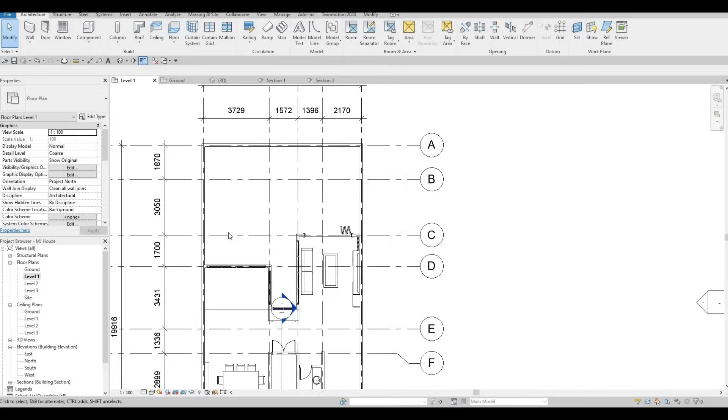What I want to do is go back to level 1, and I'll probably need to delete some part right here because I want to move this one to make it smaller, since I want basically an L-shape kitchen right here. So I'm going to delete this so it's easier for me to just add.

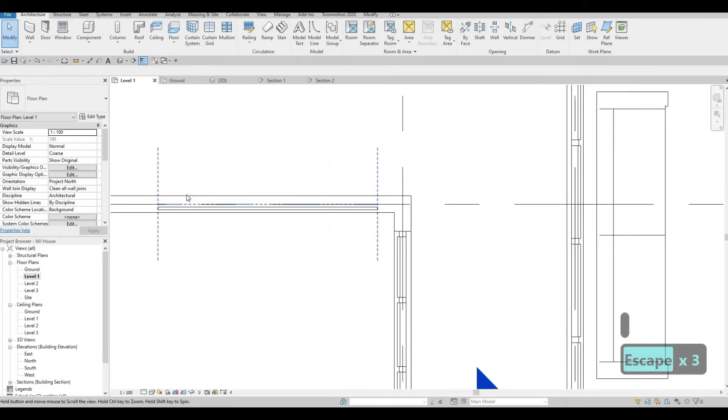I'm going to select this one, CS, and it will maintain the height and the distance from here. So that's why it's easier to just set one first and then do the others.

So I'm going to cut this one right here, and I want to make sure to make this one L, because we're planning to add more of the kitchen parts right here. After that, I'm going to go to 3D, and as you can see, it maintains the parameters that we set right here.

So now what we're going to do is go back to architecture, click on curtain grid, select that one, and add in the mullion all grid, and simply add it like that. So once you're happy and you set this up, I'll probably add the laundry right here.

So this is where the location of the laundry will be, but it's only going to be accessible from the outside. So now what I'm going to do is create an exterior wall. I'm going to go to ground floor and then CS on this, and I'm going to add a wall right here.

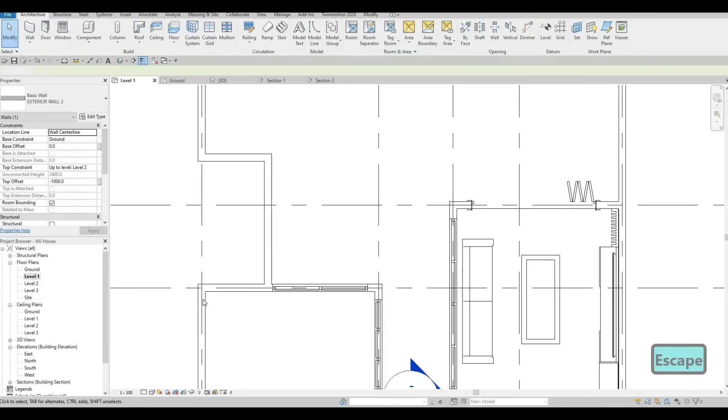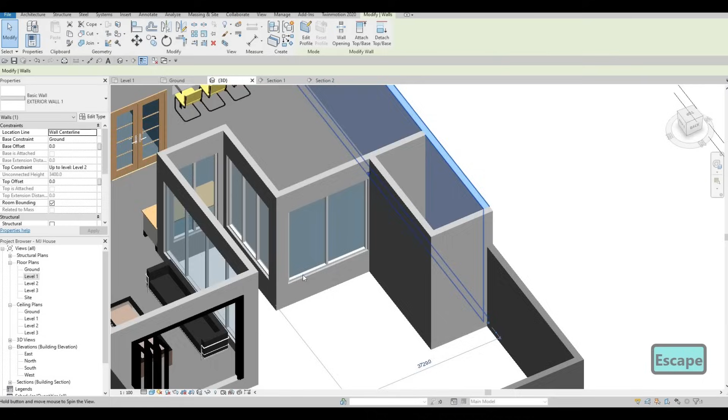So what I'm planning to do is extend this one all the way right here, and this wall will be extended as well. So we're just basically adding enough wall on this side, and then here it should be exterior wall, and here exterior wall, and this one is exterior wall number 2. And here, as we remember, we have a different finish.

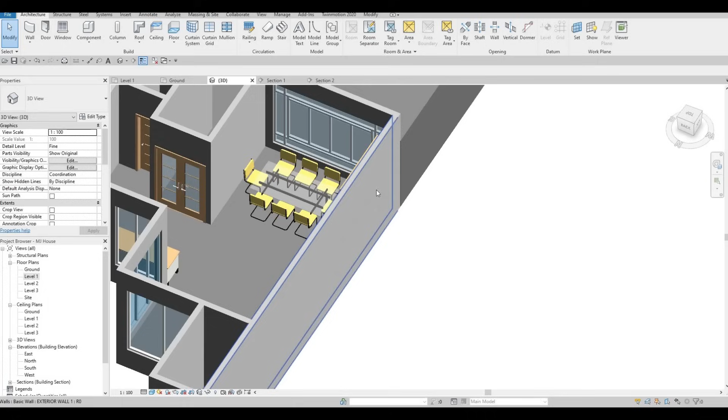So this one is concrete aggregate, and what we're going to do is split it this way so that we could have the same materials on all of this. So we're going to split those ones later on, and I just want to change where this is located.

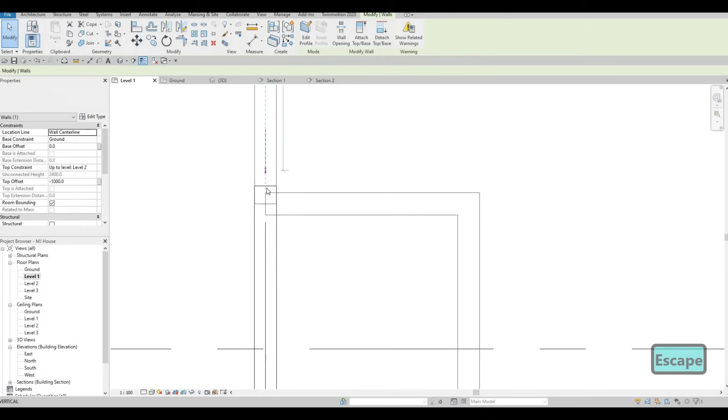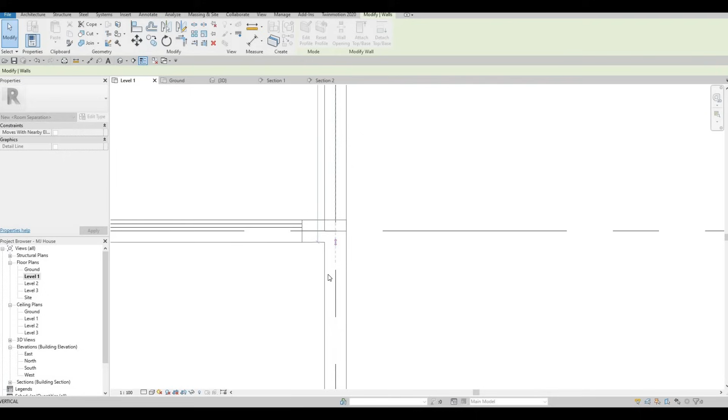I'm going to trim this out and then put it back. I just want to fix where the joining wall is. Similar to this, we want the joining wall to be on the edge, so I'm going to undo this.

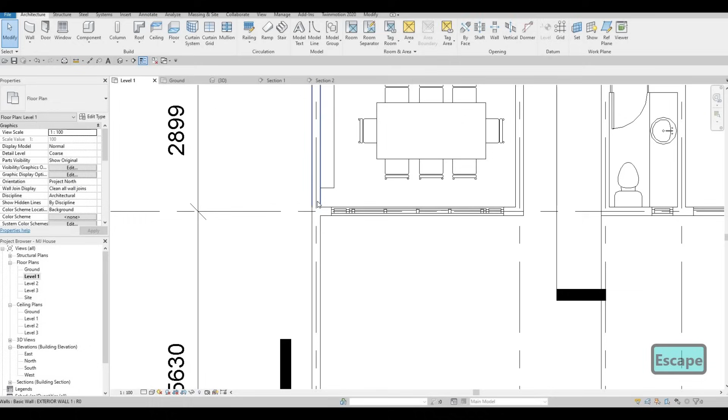So now this is the bigger wall, so it's easier to do later on. Same thing goes right here. Pull this one back first and then change the location of the bounding wall.

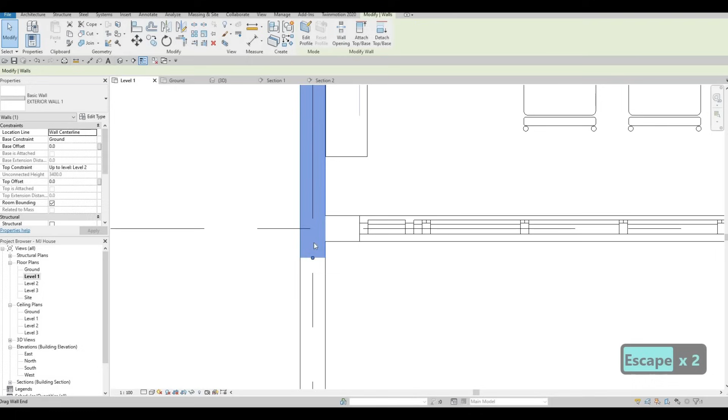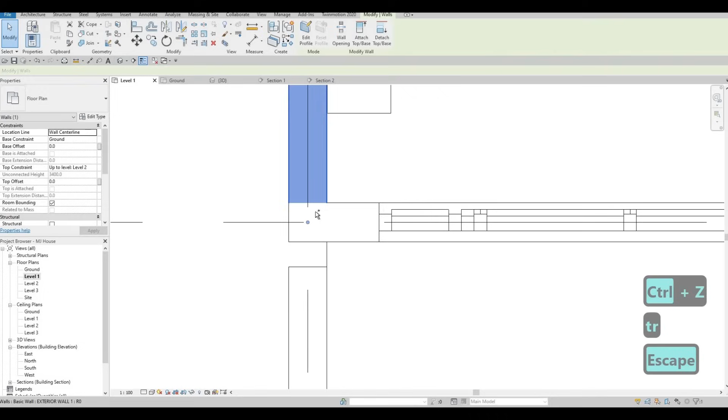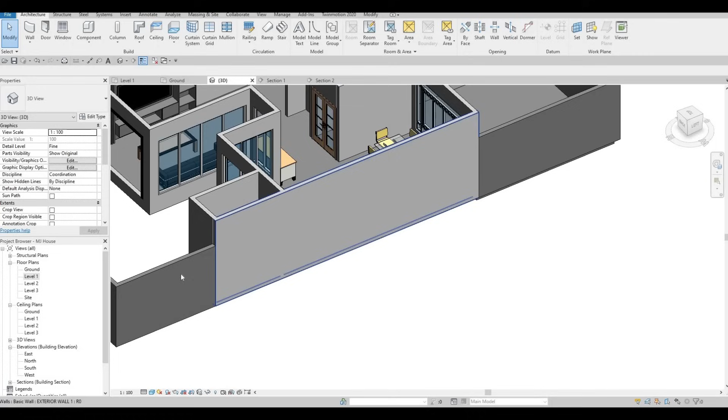Usually once you move it up and then pull it back, trim it first, and then this is because I want this one to have... so I'm just going to align this, AL, and then this is the one that has that. So once we do it, we only think of the face right there. So might as well do it now.

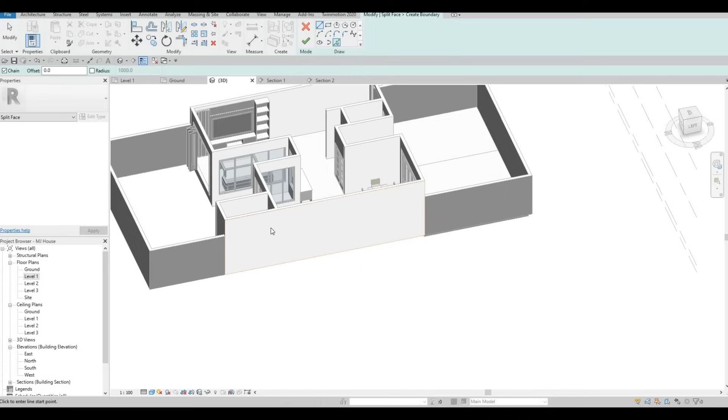I'm going to edit this type before we forget. So SF on that, and then you need to select split face, select this face. Once you do, we need to create a line. So I'm going to create a line from here all the way to there, and then click on finish.

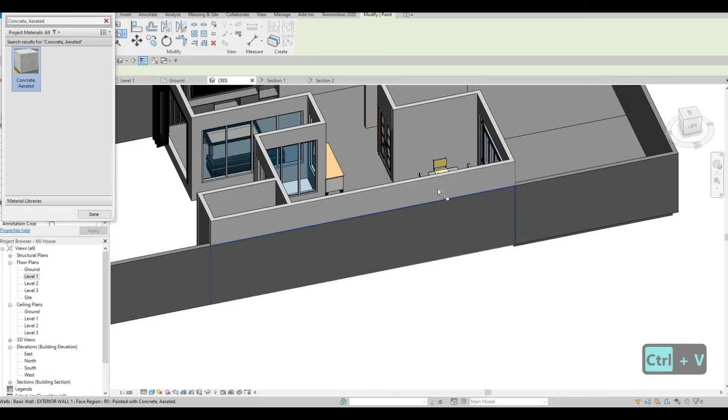After that, click on paint and then look for the same concrete and select that. So now it will be the same one as what we have before.

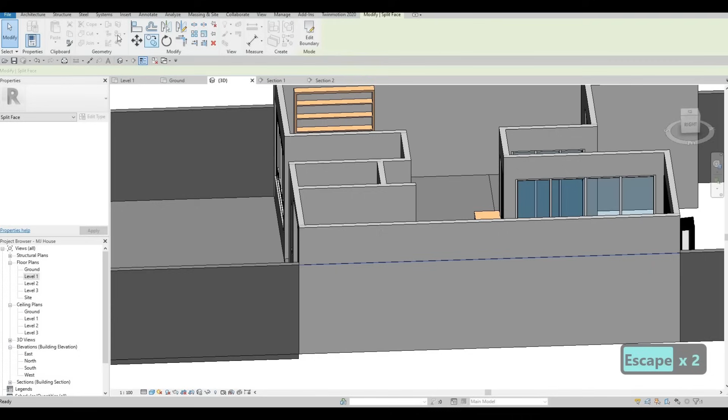At the same time, let's do it on this side as well. Split face this one, and we need to create this line right here, and then click finish and click on the paint, same thing. So it looks like everything is the border wall, and only this one is on top of it. This one got created on top of it, so that looks nicer.

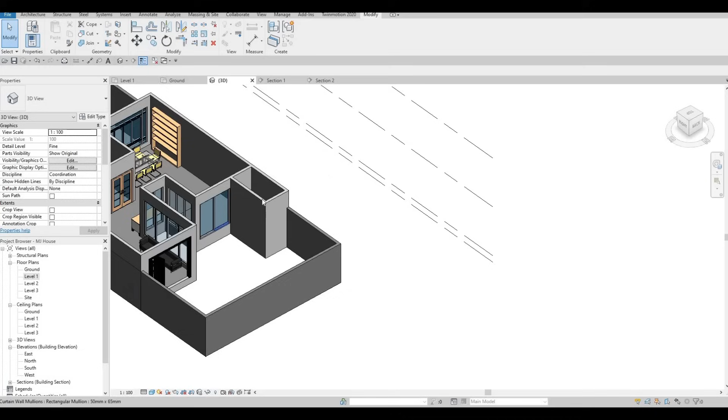So now let's go to this side. We're probably going to pull this one lower than the others, so we might just add the top right here, or we could just leave it like this. So that's good enough.

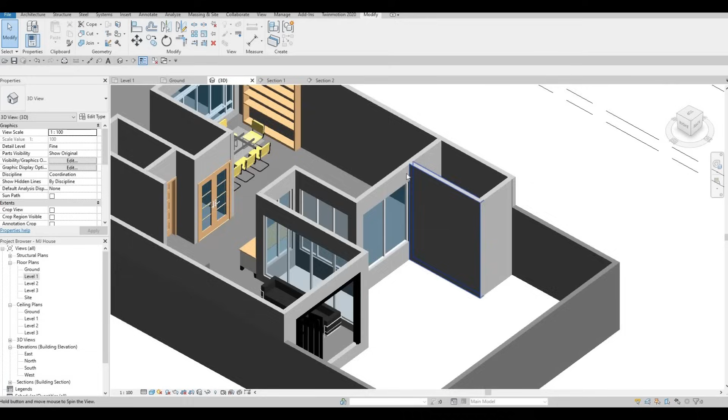We're just going to add a roof right here, and then here we could have in like a deck that goes around, and then we have our swimming pool right here. So let's create the swimming pool first.

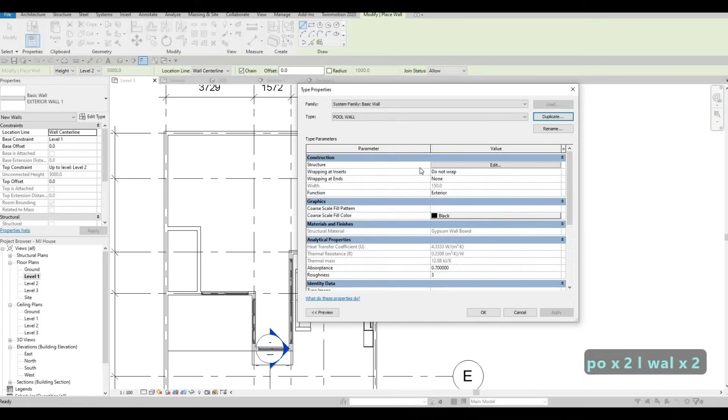Let's go to architecture. We create the wall first. Here, edit type, duplicate. This will be pool wall. Edit, and then here we could just change this one to around 50 thickness, and then here we could put something tile.

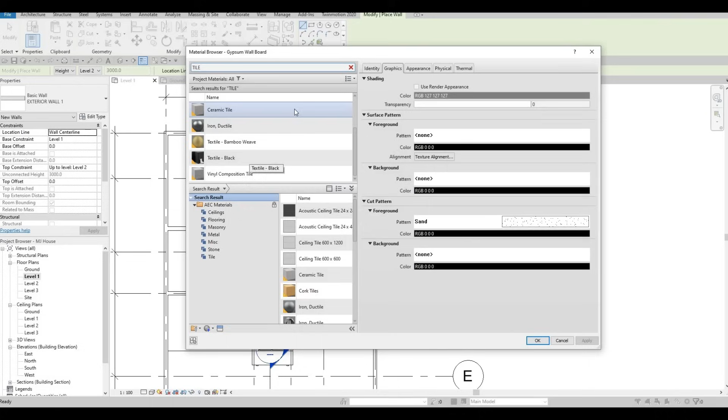So let's look for a tile. Ceramic tile will be good as well. Let's do ceramic tile, and then after that...

Let's click on rectangle. We want it to basically be on the ground first, and then click on wall. Pool wall is selected, and then we want the base to be, so top is ground, and then this one base is ground, and top level is ground.

So what I'm gonna do first is change the base to negative 2000, and then let's create a rectangle.

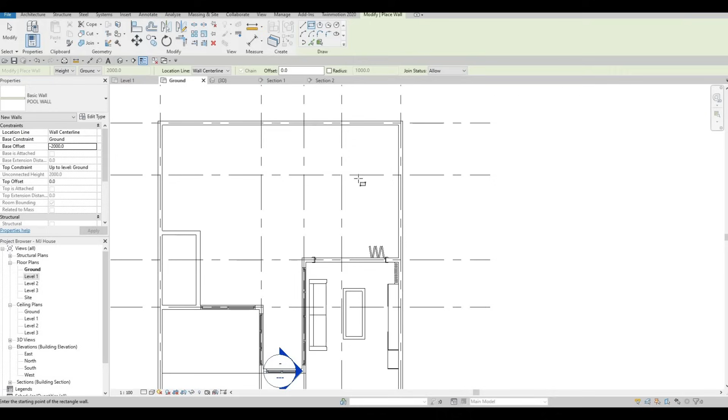So I'm thinking of, we have a deck here going outside, and then the pool is somewhere right here.

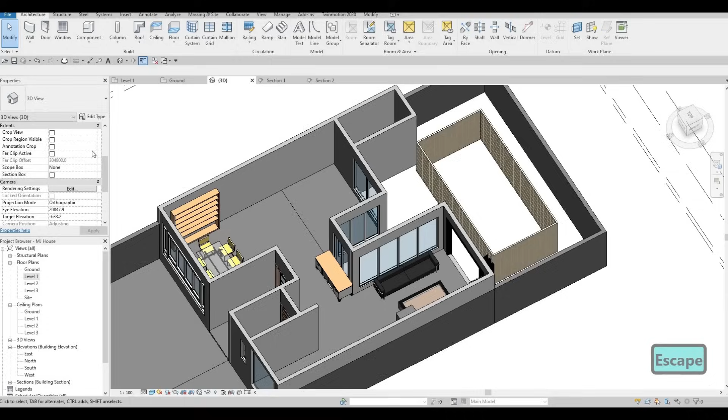Don't worry, it's because of the view range. That's why we're not seeing it. But if we go to 3D, it's right there. It's just not showing because of the view range. But in order for us to see it, go to ground floor and then change the view range, and then this one, the depth, unlimited. So it's visible like that.

So now, this is a big, I want to have a rectangular pool. We have some spacing around it, and then especially right here, we could just select tab, and then we could just move it around like that.

And then the deck, I'm gonna place it all the way right there. And then I want to give some space, probably just to have a stairs here, a steps here.

I'm gonna, let's maybe add it all the way there. We might make it smaller, this one, so that to accommodate the spacing here.

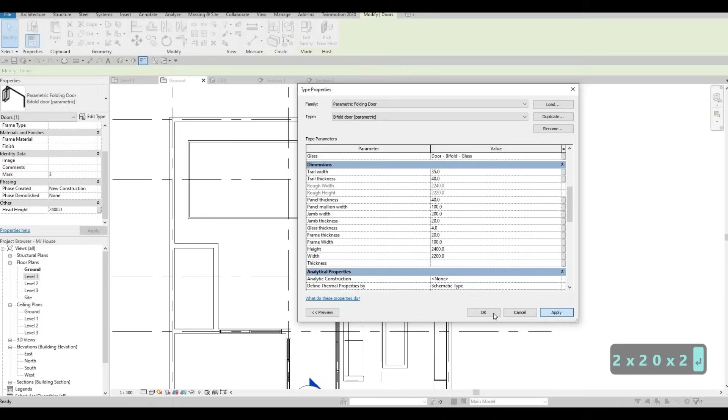I think it's too much for the depth, so here I'm going to edit this one first, the width is probably 2200, and then let's move this one more on this side so that we still have some privacy on this area. Even though this is open, we still have privacy.

And then here we could add in the deck, so it will be another flooring, wood material, and then steps to add.

So now I think I'm ready to just leave it like that, and then we could add in a surrounding floor. I'm thinking of adding some grass as well on some portion, and then maybe this one should be a floor with grass, those kind of stuff, or so we could just look into that more.

I just want to finish the swimming pool first. Let's add in...

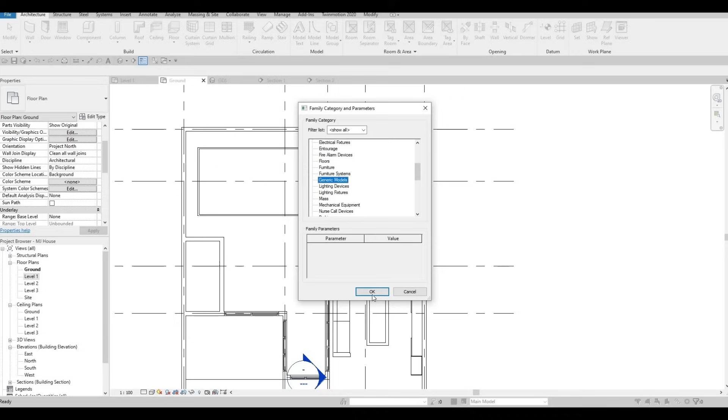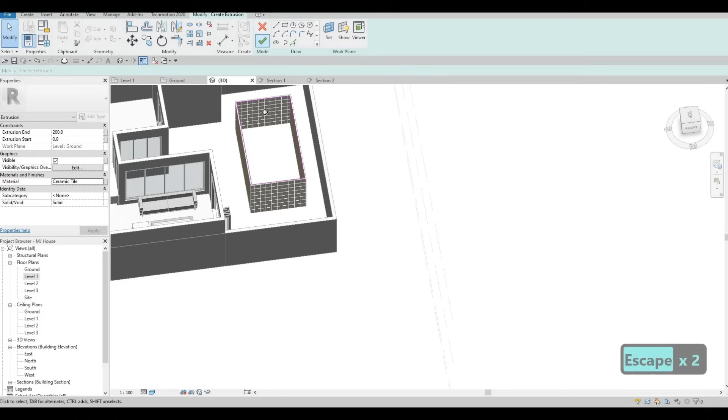I'm gonna copy that, and then here I'm going to create something that looks like this, and then let's go to 3D to see how it looks. Click on finish, and then put this one all the way down.

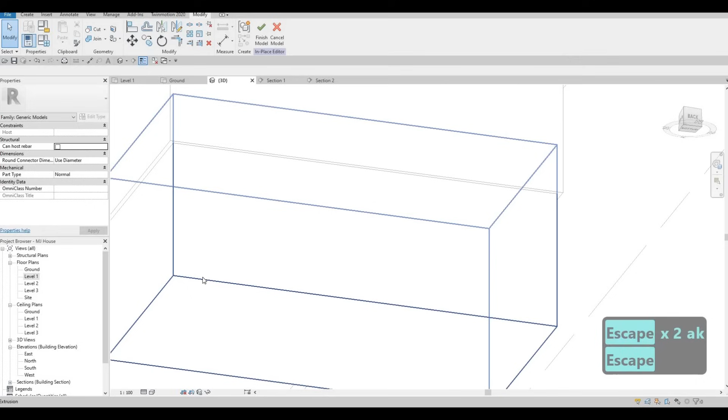I'm going to set this one, just too much, so AL. So AL, sorry, AL. Click on that, and then click on the bottom, and we want to make it shorter, not too thick.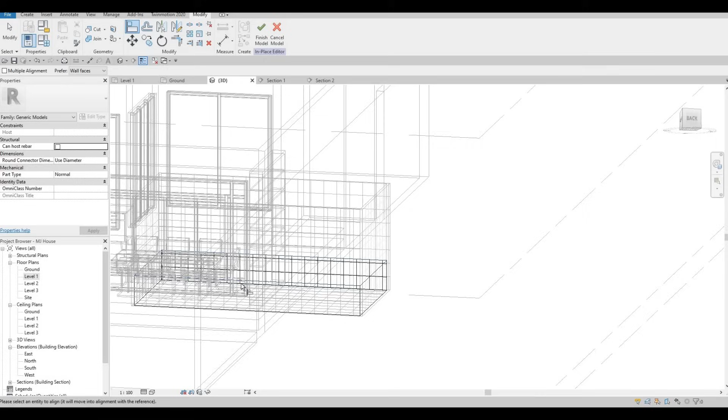I'm going to make this wireframe to see how it looks, so we could just pull it one down. I think that's good enough, and then we could put in some stairs or whatnot.

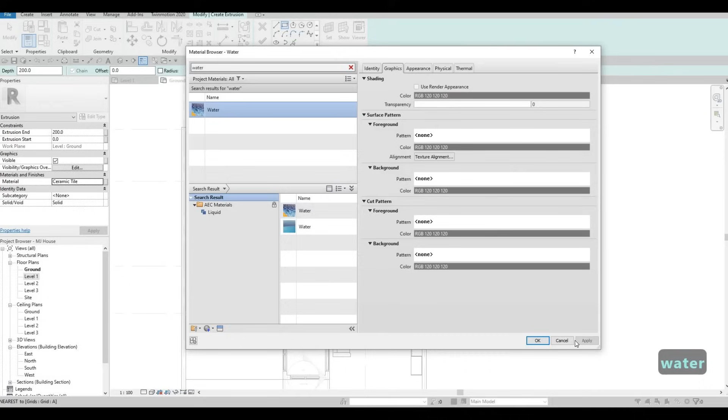And then after this, go back to ground, and then let's create another extrusion, same thing, but with water. Pull this one up, click apply, OK, and then add it on top. And then click finish, look at it in 3D, and we could just pull this one down.

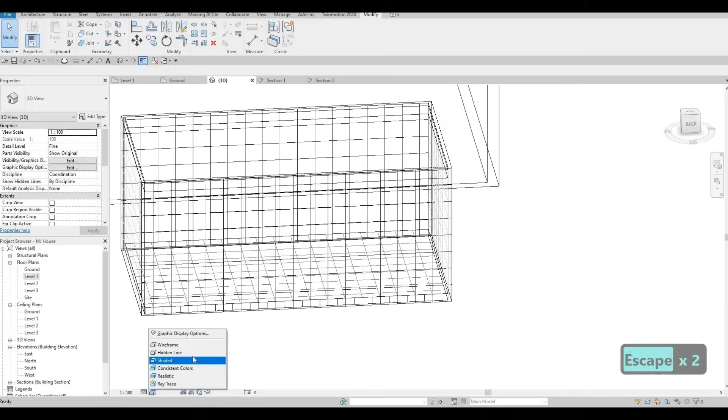There we go. Click on finish, and then let's change this back to hidden line, and we could see it in the ground and in 3D how it looks. So now we have something that looks like that.

And then we could just create the deck. So let's go to ground, let's add in another floor. Edit, duplicate — this will be floor number 5, with a 400 thickness, and then this one should be a wood material.

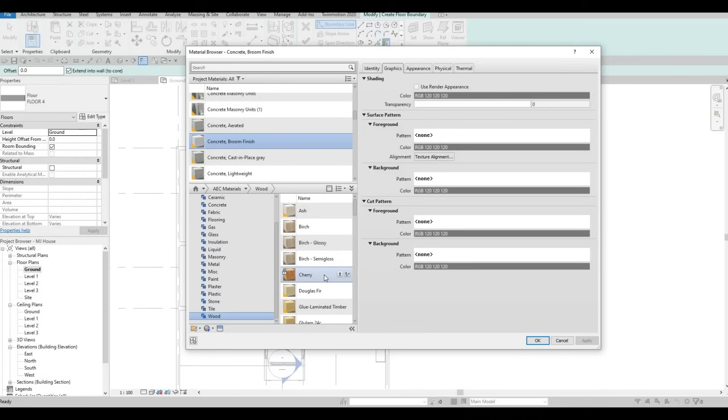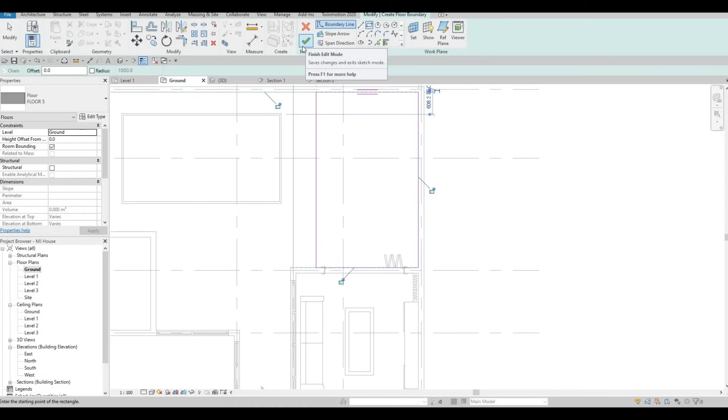So I'm gonna choose mahogany, click apply, OK, and then I'm gonna copy this, Control A, Control C, and then here I'm going to add something that looks like this, and then click on finish, and let's look at it. So that looks like that.

In terms of where it is, it should be on level 1. So there we go. And then we're going to create something right here. I'm planning to add a stairs again, but I'm going to create it similar to this.

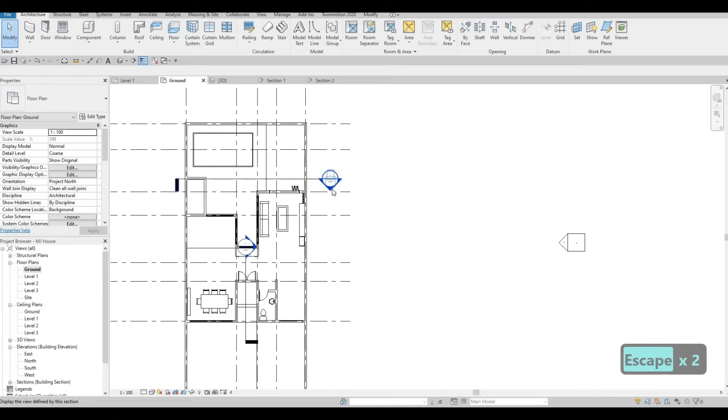A model in place, a generic model. So here is what I'm going to base off — a model in place, generic model, and then here I'm gonna click on extrusion, pick a plane, and select this wall right here, click on rectangle, and then change this to mahogany, and then we're just going to add the steps now.

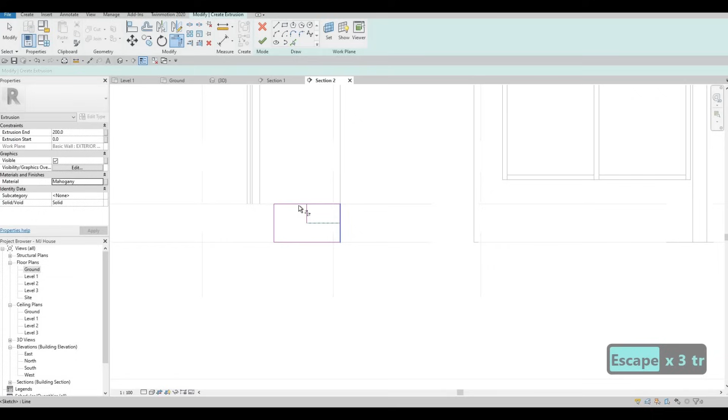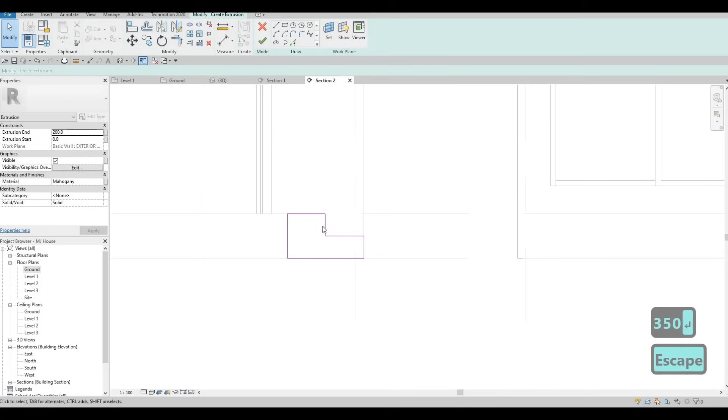We could just add it simply like that, very simple, and we just need to add it in the middle, so this should be around 350. There we go, so that's roughly the midpoint, and then click on finish, and let's look at it in 3D and expand it a little bit more.

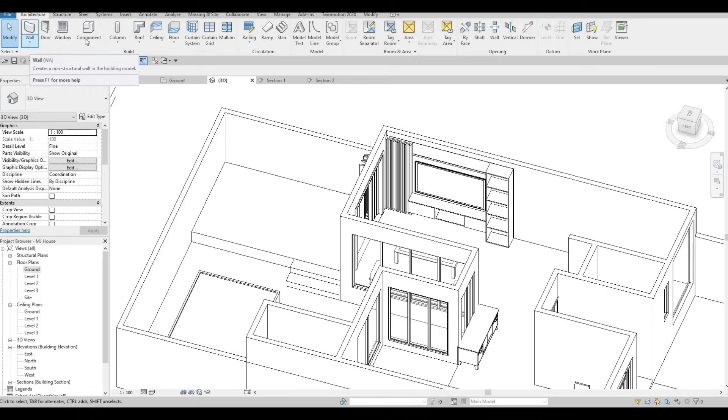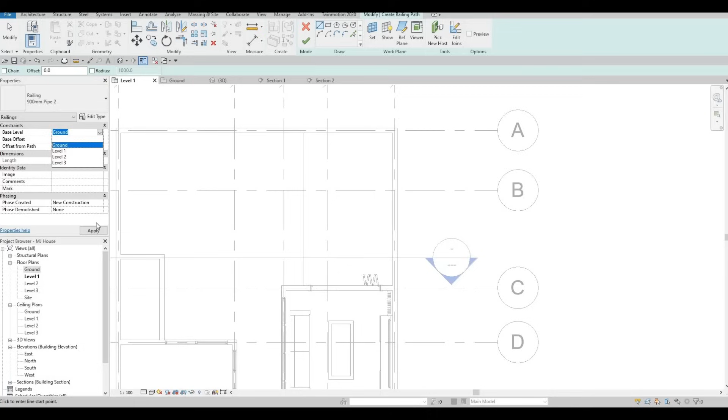At the same time, we're going to have some railing right here to make it nice, and then right here we could just go back to ground and add the railing. Let's use this pipe, let's duplicate this, put pipe number 2, and then add this one to level 1 — base should be level 1.

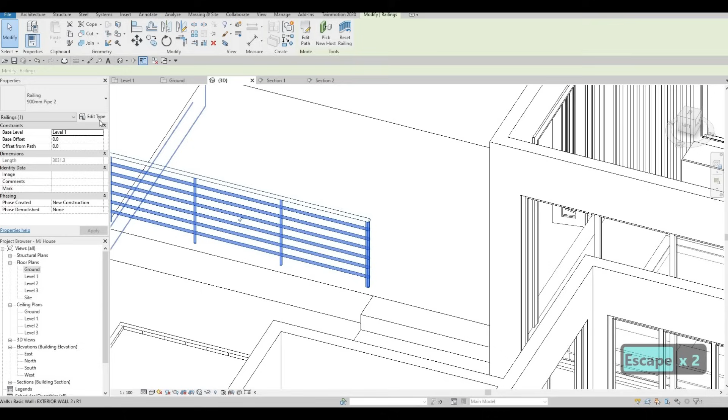And then add it right there. So even though we put it right there, it should be on that side. Click on finish — obviously we could do much better work right here. Instead of this one, I want it squared, not circular, I don't want that, I want it squared. And then a technique here is you could just copy and Control C, Control V on those to make it faster for you.

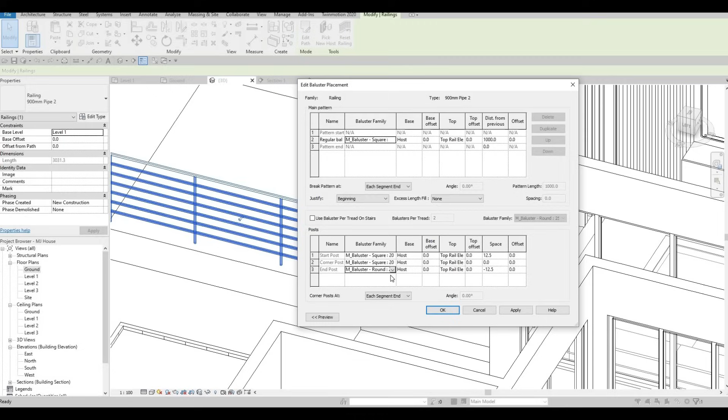And then click apply, okay, and then here I want it to be squared as well. And then the baluster — I don't want it right there, I want it squared as well, and then squared. So I want it to be consistent with all of them.

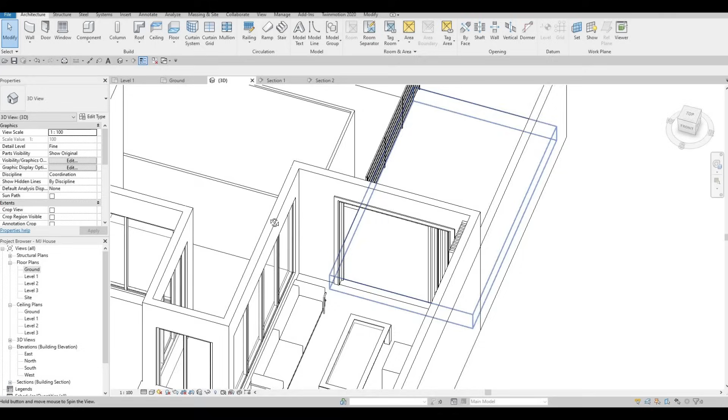And that looks like that, so I'm happy with that. The only thing I forgot is to add the material, but we can add it later on — I'm not gonna focus too much on that. So at least we have some handrail there and some steps. We could always push this one all the way there so there's no issue, but why not add a railing here as well?

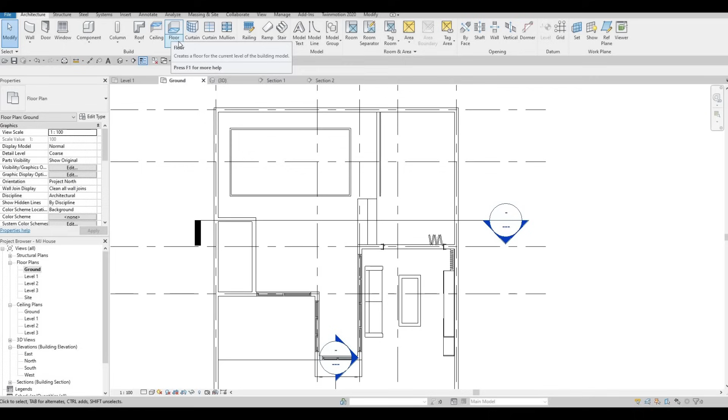At the same time, we could add in floors. So select this, edit type, duplicate. I'm gonna duplicate one of the floors — not this one, because I want to maintain the 200 on others — and I'm just going to select a different material, probably concrete, not the block pattern, something different.

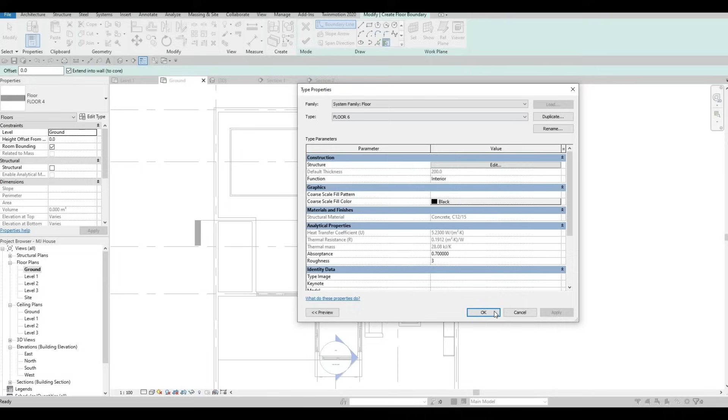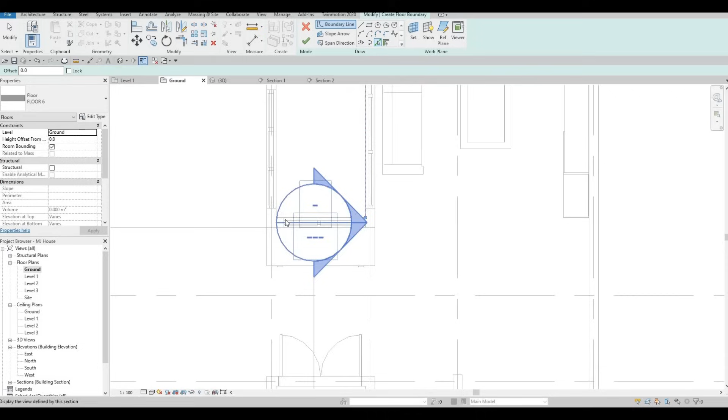And then here I'm just going to go around here, and then let's pick this one right about there, and then just all around this area. And then let's trim and extend.

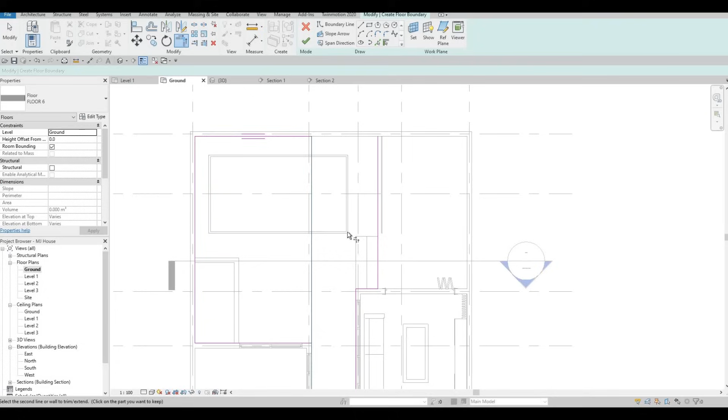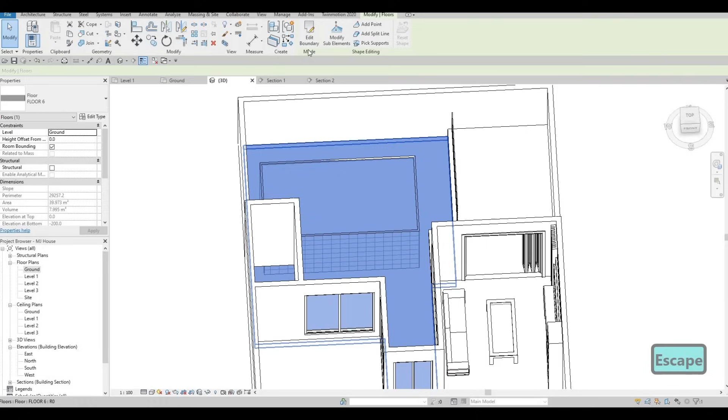And probably I'm gonna add this one as the same floor, so I'm just going to leave it like that for now. And this one we just need to trim and extend on this one, and then trim and extend on here. Click on finish, don't attach — and then we forgot to create an opening there, so might as well just select a rectangle and add this one like that.

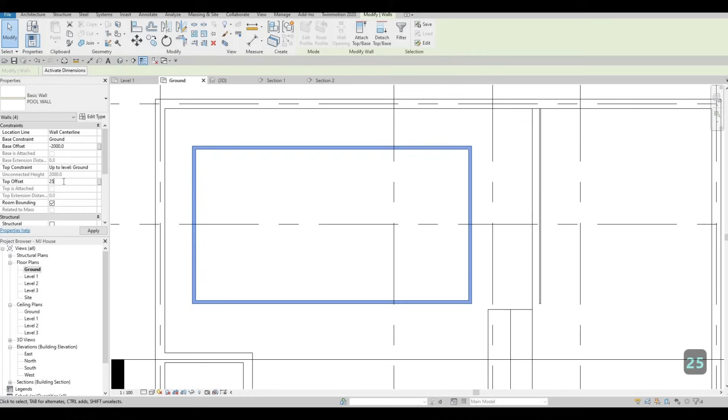Don't attach. And then here for the walls, I want my walls to have at least 25 top offset, so at least it's a little bit on top of there. So let's stop here for now and continue in the next video.